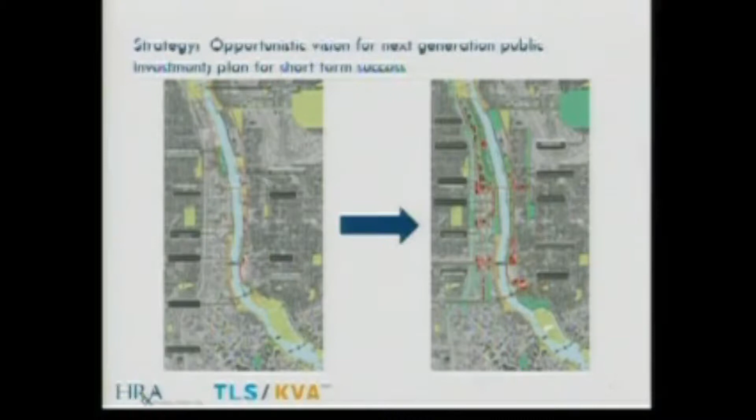In order for that vision to be achieved, we think we need to identify and cost a first phase of work—a phase that is significant enough to indicate that something really special is happening, but small enough to be bite-off-able and achievable in the short term.

We think that first phase of work has to meet four criteria for success. First, it has to establish that the projects advanced in the first phase are successful in bringing the diversity of people who live and work in the city to the river. It can't feel like that first phase is being advanced only for some particular group or groups of people. We have to see all of Minneapolis on the river in the first phase.

By doing so, that first phase has to foster advocacy for completion of the larger vision—advocacy at elite levels and at grassroots levels, a coming together of the community to ensure that the vision gets built out. In doing so, one expects that the first phase should garner media attention, not just local, but national and international media attention, because it is a city branding effort.

Finally, the projects in the first phase have to demonstrate that a variety of public, not-for-profit, and private sector entities can actually get together, negotiate deals, and get projects built, indicating to the citizenry and the business leadership here that this plan can actually come off.

The design team is now going to walk through the components of the plan from a design and vision point of view, and then I'll come back and talk to you about what we think the first phase is likely to cost and where sources of funding can be identified for both its capital and operating components.

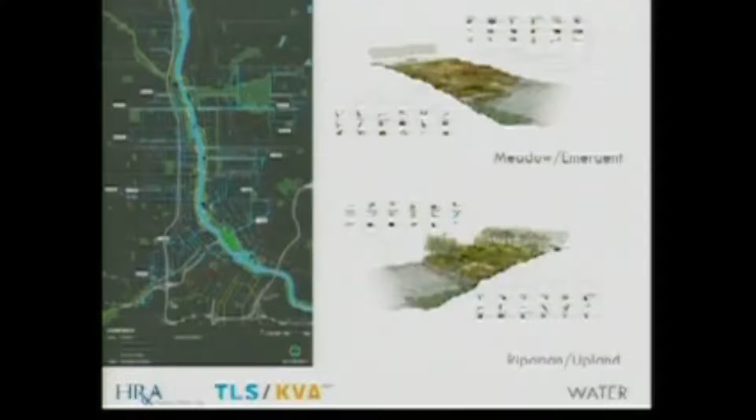Those landscapes are supported by varying levels of soil moisture, and we can go into more detail, but basically the position of landscapes in relation to elevation and water is being used to design the entire system.

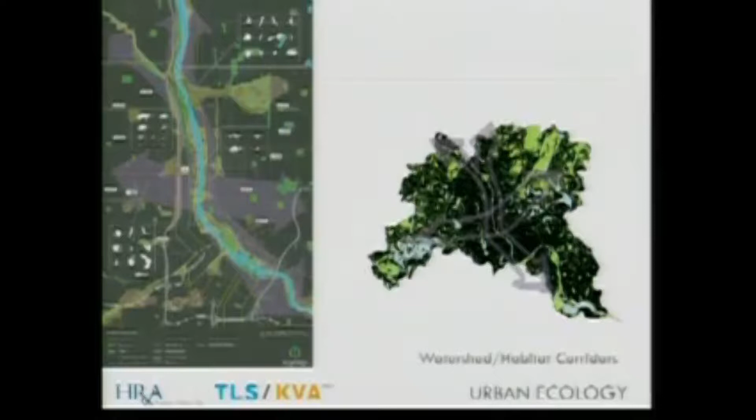And this is the outgrowth of this habitat diversity. We will now have a corridor that works both north-south and east-west to complete the grand rounds, not only for people, but for all species, animals and so forth, to create a new flyway through the entire Mississippi corridor. And Sheila's going to expand on that.

Thank you, Tom. So we propose to make a comprehensive remediation of the city's stormwater system, to clean that water using natural processes, and then to use that water in various different moisture gradients to create habitat to support the carrying capacity of the kind of very important national flyways that you see illustrated in this diagram.

So it's not just about water moving and about birds migrating and animals moving. Of course, it's about people moving. A central concept of RiverFIRST is to bring the citizens of Minneapolis to the river.

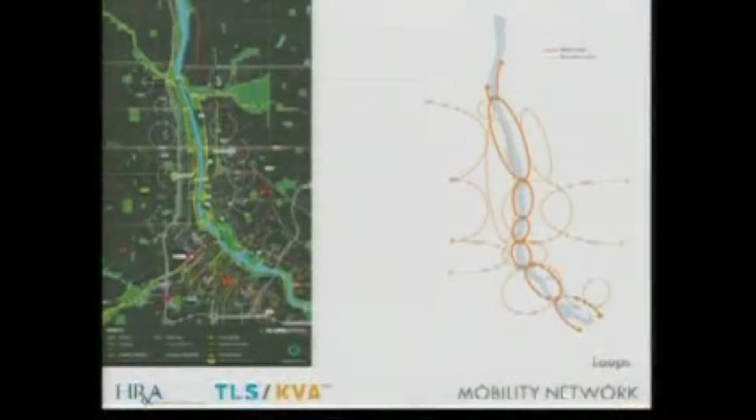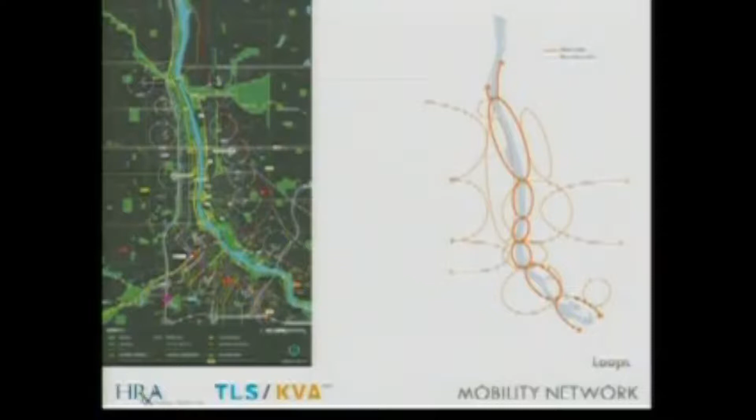There's a comprehensive bicycle path system, and you see there in circles the kind of radius from any point on north and northeast neighborhoods. You could walk to the trails in under 15 minutes, you could bike there in 5 minutes, and you would have a world-class pedestrian and bike transportation system, trail transportation system.

And you're fortunate enough to have a fantastic USGS internet site which provides 90 stream water monitoring stations. This is already in place in the state, just north of Minneapolis. And we propose to take advantage of that resource and pair that with social media to create a communication infrastructure, which would be a cell phone application that we propose be called River Talk.

This would allow the youngest generation, and indeed all citizens of Minneapolis, to get information about the river, to coordinate events on the river, and we think there could be a very significant educational and interpretive public outreach that could be brought into the classrooms.

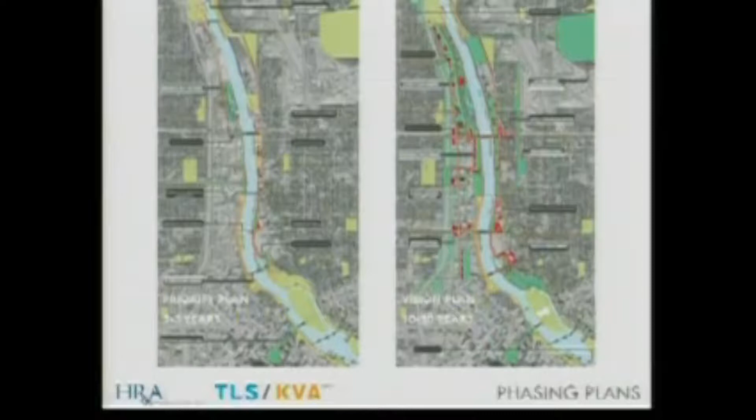This is a lot to talk about in 10 minutes, but we're going to try to move through. Please do interrupt us if you have questions. We'll try to answer them.

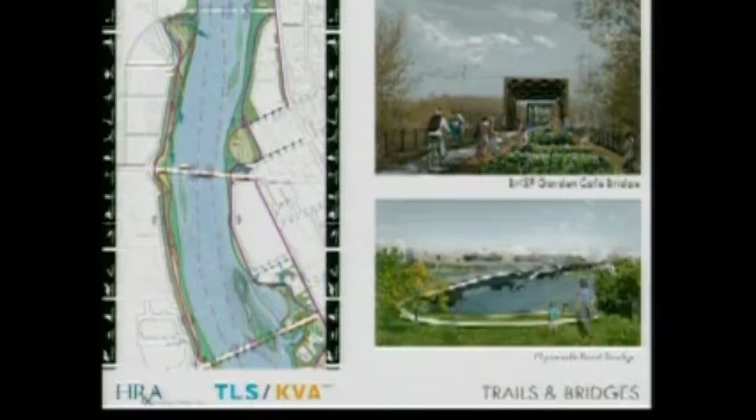This image shows you a view of what the BNSF bridge could look like if that became much more friendly, with that existing bridge reappropriated for bicyclists and also for pedestrians. And then this is the Broadway Bridge, and you can see here the very light, delicate steel pedestrian bridge that we propose that would come across and connect these two sides. I apologize, I misspoke—this is the Plymouth Knot Bridge.

This is up at North, just to show you how these trails would connect with northbound trails up at Camden Bridge. And I'd like to draw your attention to what we're proposing here, a series of floating islands called biohavens. These are materials that are machined and made locally here in Minneapolis. The idea is that there's a matrix of recycled plastic, made out of recycled water bottles, and this is a matrix in which plants can be grown in the water.

And there are some very significant remediation figures of merit associated with each of these islands. These islands have been implemented in Montana by the Army Corps and in other sites. We propose to have them here, and I'll share that each cluster of biohavens—we have 6 in this plan—the root systems of the plants can bioremediate 32 kilograms per day of phosphorus, which is the equivalent of about 1,600 gallons of dishwashing soap, just to put it in everyday terms.

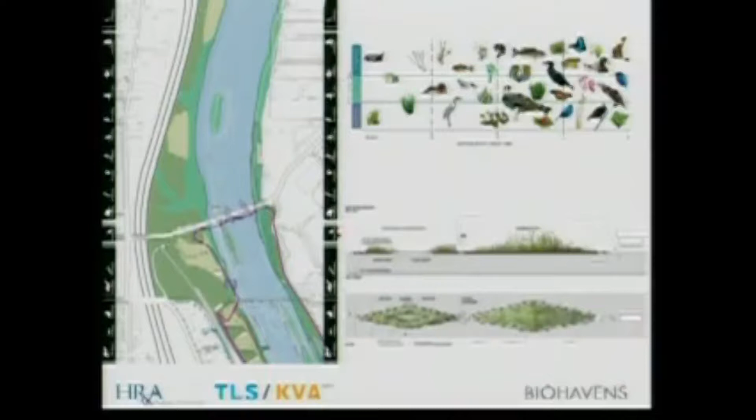They can also remediate about 600 kilograms a day of nitrates, which is particularly important because, as we know, the river is currently impaired for nitrates. This represents more than 225-pound bags of lawn fertilizer. So we feel this would be a way to really clean the water and produce about 5 acres of new habitat that would significantly increase the carrying capacity for migrating birds and also other endangered species.

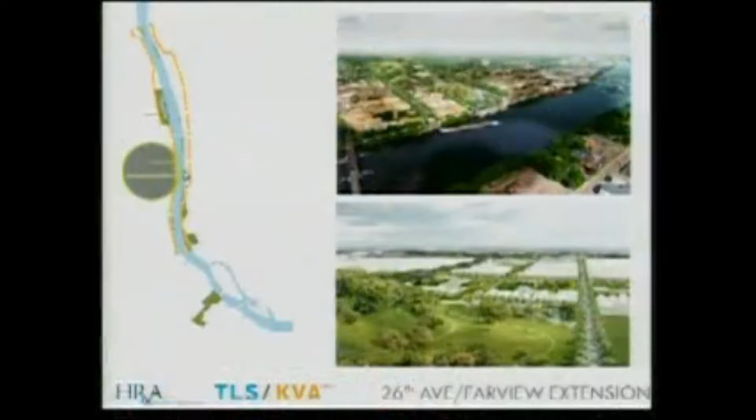I'm going to start talking about the next district. We've talked a little bit about the trails, the knot bridges, and the biohaven islands. Now we're going to talk about the connections to Farview Park. Here in this perspective, you're looking at an aerial view of Farview Park, which is a historical high point. This represents the extension of the 26th Avenue Bikeway, which extends west to Theodore Wirth, with a fishing pier that you see here at this end, and a trail system that moves along, at times rising above existing industrial operations and then landing again. Tom, do you want to continue to talk about this?

Yeah, the fundamental impulse here is to bring the north side down to the river. And if you look at this lower drawing, when we stand up here, we wonder how can we do that? So what we'd like to establish is 26th Street and 28th Street as a major framework for setting up a district which can be implemented over a period of time, infilling with urban agriculture, with ecologically related business, so they can grow with the changing economic situation.

Over the course of the last 4 months, the design team has contacted all the industrial business leadership along this reach of the river and spoken with a number of different CEOs. And here you see a view of this flyway bridge, which at times rises above, allowing the industrial operations—for example, you see here the gantry crane and the equipment of Lafarge—to continue to operate while moving the public safely over these crossings here.

So we think about this as Minneapolis's own High Line, if you will, but this is better than the High Line because it's a spine that really supports conservation, and you have the Mississippi River here.

Scherer Park. What we're fundamentally trying to do is set this up as the urban welcome mat to the entire system of trails, of boating, and of kayaking on the river.

And what we're proposing fundamentally is to recreate Hall's Island, which is a historic feature in the river, pushed out a bit more, and then inviting the river inside to create a more shallow backwater where people can get in and out of boats, where there can be a very large gravel beach and a very large bowl-shaped space, which is created by the embracing arms of Plymouth Avenue Bridge and a new bridge extending over to the island itself. So when you step into this space, you are in an unprecedented scale of this city, of a new beach and a launching point into the river itself.

At this early stage of the proposal, the programming really hasn't even begun, but we'd like to draw your attention, Commissioners, to a theme we heard time and time again in community meetings: people really wish the programming of the new park to be related in some way to the river.

We're proposing a suite of program ideas which have yet to be validated, including a local farmers market, a community arts center, and a kayak or canoe rental. We've spoken with operators interested in bringing this facility to a site like this, to think about how recreation here could be related to the river in terms of both recreation and education about the river.

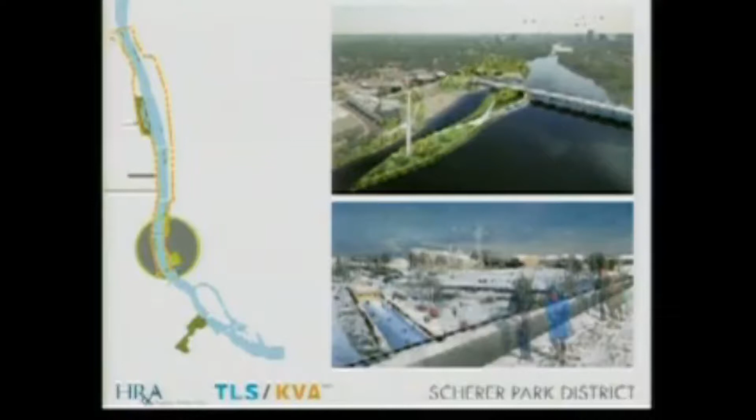This is a view of what that beach might look like with the kind of activity we see happening there. You can see Plymouth Bridge beyond.

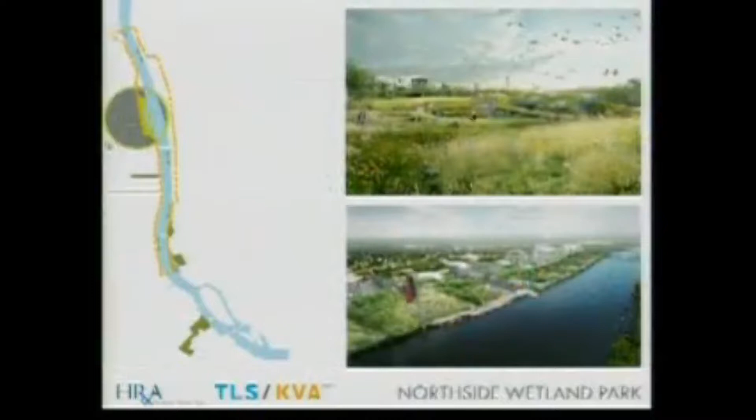Moving then to the north side wetlands here, I'll let Tom talk about this. Well, we think it's time to make a proposal for the port, and so we're here to do it.

Our idea is that you can consolidate the port operations in the northern half of this very long strip along the Mississippi. We believe there's a 20-acre site to the south, which is the most inefficient storage of bulk materials in our view.

That site could be converted to a new wetland park, connected very strongly to the north side by a bridge along 34th Avenue. You see in the upper illustration a view over the entire wetland. The purpose here is a few things at once.

One is to create a massive new collection and remediation system for stormwater from the entire north side, to create a very diversified and ecologically resilient new wetland system together with upland meadows and gathering spaces, and to create a destination for the entire city in terms of ecological diversity.

Now, the area to the north—if you consider the cold storage building one boundary—the question is what happens to the north. There are a lot of scenarios under consideration, and we can't imagine all of them. We've probably taken the most extreme view; the landscape architects can't help it.

What if that whole zone was park? What if you had a park extending from Lowry Bridge all the way to North Mississippi Park? It's a potential. In any case, we have a lot of material coming out of the wetland, and we need to do some land forming to complement that excavation.

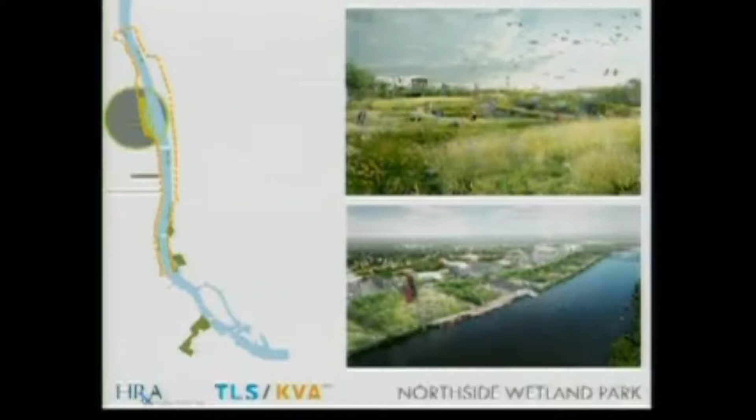The entire architecture of the site is based on the idea of bins, a way of storing dredged material that we'll need to process over time until navigation stops. What you're seeing here is the first evolution of a bin, where a ridge trail can traverse the entire zone along the backbone, along the railroad.

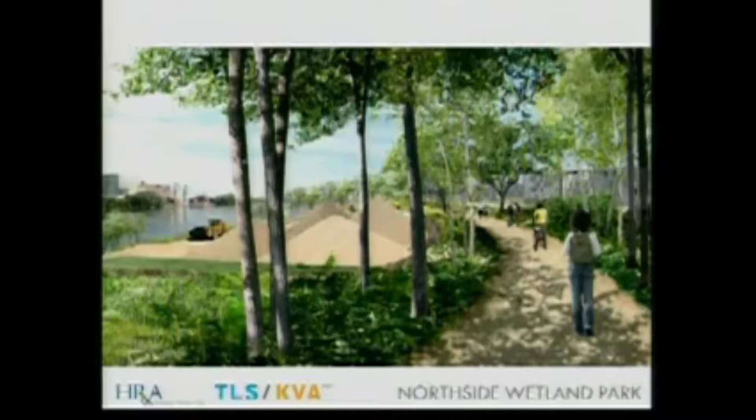Arms extend, and then we use the infield stored dredged material as it's being processed and transported. There's potential for early settler and native agriculture, and the possibility of park rooms that are basically meadows for people to come in and use, backing up their pickup with their cooler and beer for a fantastic barbecue. So what we're proposing is that this park could be built from what's currently thought of as a liability, the dredge spoils removed from the river, and transform that into an asset, growing this park over time in a series of public river rooms with a variety of topographies and programs.

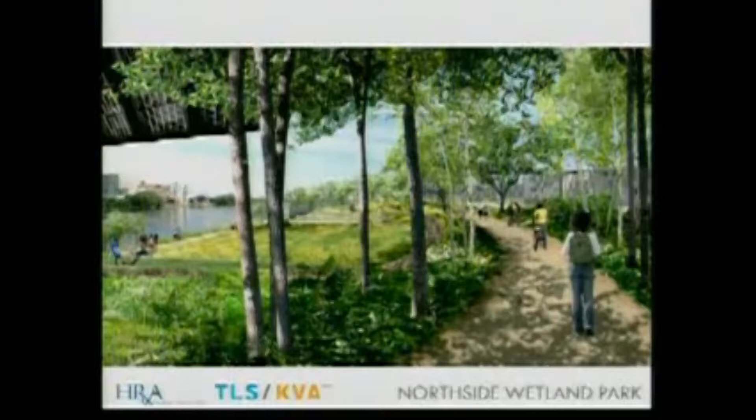And here you are. This is the new form of transportation that you'll all be enjoying soon. This is your experience within the wetland park. It's a new experience, and it's also old.

This is what was here before. This has been restored from its original condition as an oxbow, and also the context that you all know of, power lines, of the industrial heritage. Things have been brought together as a synthesis.

This story is really about what happens in this next century and how we can help create, working very collaboratively with the city, with parks, and with communities, a major cultural shift, a major change in attitude towards the Mississippi River. This is also about how Minneapolis, as a metropolitan city, can find a new way of coexisting with and sustaining a really dynamic living river system.

This is a unique river. We don't need to tell you that. This is about transforming what was a backyard into a front yard, and really creating a set of recreational and educational river resources in a river park system that is commensurate with a national park system.

Last project we want to talk about is Gateway. This is an initiative being led by the Trust for Public Land, and RiverFIRST, the team, is supporting this in terms of its hydrologic connections and its ability to connect people down to the river itself.

What you see in the lower image is the possibility of a major new riparian corridor on either side of Hennepin Avenue, which could frame the entry of people coming across that bridge and entering downtown, grown from the nature of the place, grown from the above-ground hydrology brought up from the river itself, and bringing people down to the river.

Within the park space above, we're recommending an above-ground hydrologic system which could embrace the entire watershed of downtown and clean this water as an amenity, growing the park based on natural principles of forestation and emergent meadows.

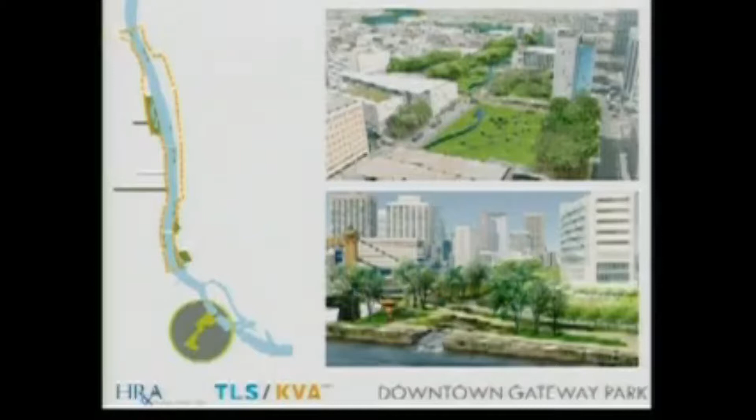Okay, Candace and Danny are now going to present their work on the financial plan for this.

I know the design team would like to spend more time with you talking about the rest of the vision and the other projects imagined for subsequent phases of activity. We've focused tonight on what we think a first phase might be—the collection of projects that we think, by virtue of their ownership and siting, could actually be executed. These parks could get built, and they would succeed in strengthening Minneapolis's brand and bringing everybody who lives and works in the city down to the riverfront.

If the 5 projects that Sheila and Tom began by talking to you about—the riverfront trail system, including the extension of 26th and 28th to the river, the knot bridges, the biohavens, the Scherer Park District, and the Northside Wetland Park—were built as described, we believe the public costs of those capital projects would be something like $145 million, inclusive of a responsible contingency and soft costs.

Now, there are some elements of those projects that are new and more difficult to build. We have less experience with them as a construction industry, and therefore we've shown those numbers with an additional 20% contingency, describing a range of capital costs of between $145 and $175 million, which we think is a reasonable estimate for what these parks are likely to cost if built in the short term.

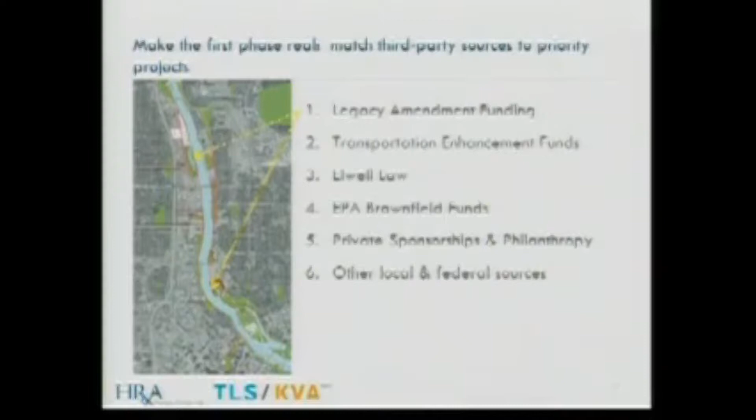It seems to us, on the other hand, that the more significant challenge you're going to have is securing sustainable sources of operating and maintenance funding moving forward. While many cities have found it's possible to raise the capital, they've also found there are challenges to raising operating and maintenance funds, and without securing those funds, your investment is in many ways wasted.

There's a spectrum of sources of operating funding we look to, because it's increasingly clear that the fiscal condition of states and cities across the country is that the general fund, and even special levies like Support the Parks Board, aren't adequate to sustain the kinds of visions of cities like this one.

There's going to be real challenges in finding operating funds for this park. It's not downtown, and therefore won't have the ready access to sources of corporate and personal philanthropy that the Bryant Parks and the post office squares have. It does not traverse neighborhoods that are currently affluent, and this is not a city projected for near-term significant residential or business growth. So finding sources of wealth, expecting to go to the corporate or personal philanthropic community, and being able to locate all the operating funds that are needed is going to be difficult.

Instead, we think it's going to be necessary to, as with the capital, think project by project about where sources of operating funds are likely to be.

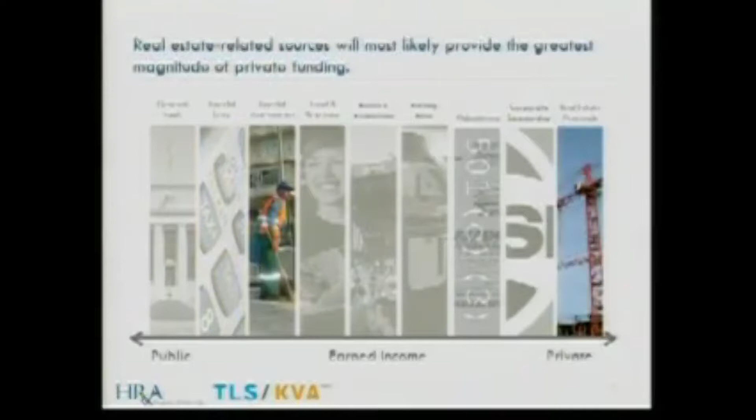Shortly thereafter, though, and in the near-term, planning for the notion that real estate-related sources can be a major source of operating funding also is, we think, worth thinking through very carefully. This, again, has been the experience of most other cities seeking other sources of operating funding.

That real estate, the value that new parks create in terms of additional real estate development and higher value existing real estate development, is something this park ought to capture. It's creating that value; it should be sustained by the increment in value.

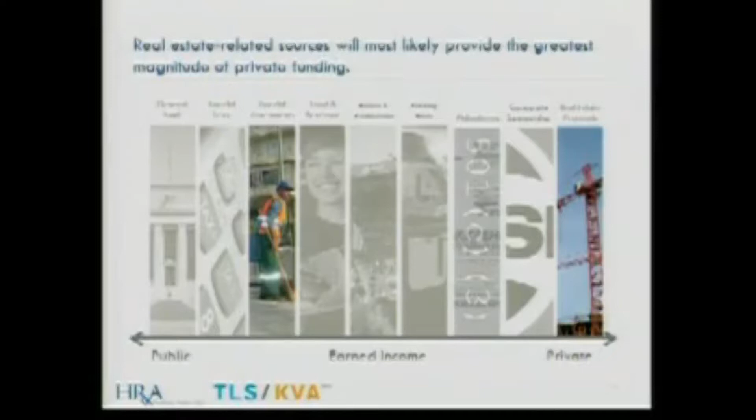And there are really 2 ways of getting at that. You can levy various kinds of special assessments on the increment in value, or you can actually develop your own publicly owned parcels and use the site disposition proceeds to help support the park.

In the short term, and remember this is proposed for phase 1, all the market data we've reviewed suggests there are really 2 kinds of uses that could be appropriate for being developed on public land adjacent to the park, and that pencil from a development point of view: first, low to mid-rise residential, and second, owner-occupied space.

We show you the Coloplast building here, not to suggest that Coloplast is appropriate for the park, but that these are the kinds of entities that don't need to make money on development, that value being on the riverfront, and want to occupy their own buildings to the extent that what they're doing is consistent with the mission of a park, are appropriate and do work as a market proposition.

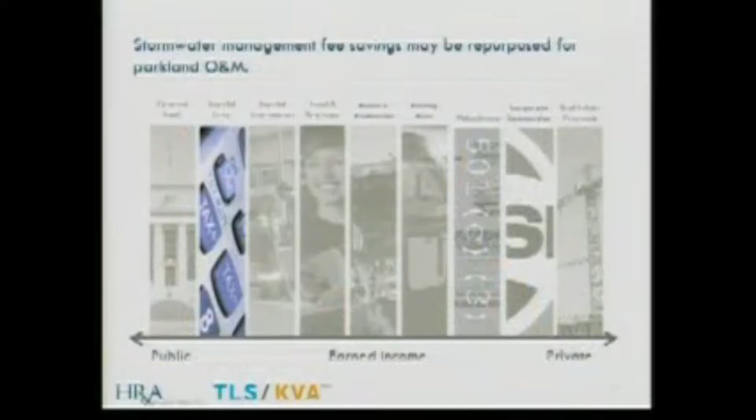What you'd be looking to do is develop public land in a way that creates an operating stream of revenue. Rather than selling it, ground lease it so you're getting rent for the long term and retain the value of the land. Similarly, you can think about special assessment districts or housing improvement areas around the parks where real estate value might be created, and look to that as a source of operating funds. We think real estate is likely the single greatest source of new operating funding, but it's worth looking at other sources too.

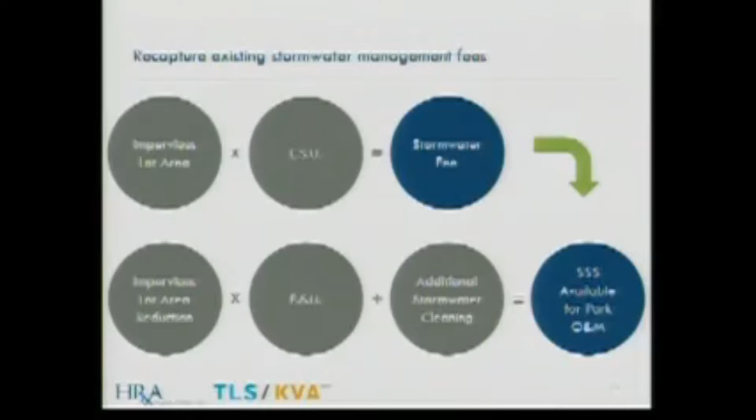This plan creates enormous environmental benefits for the neighborhoods around the river and for the city and region as a whole, and some of those benefits may be able to be monetized. For instance, you currently have a stormwater management fee applied based on how much impervious cover exists on a given site. If some of that cover were removed by how the park is operated, and the water is clean and the site less impervious, you could share in the reduction of stormwater management fees with the owner. The owner benefits by paying less, and the park benefits by gaining a source of funding that otherwise would have gone to stormwater management fees.

Neither of those sources - real estate, plus the existing levy, and the stormwater management fees and other environmental levies - are likely to be sufficient on their own. There will still need to be thinking about how these parks are programmed, whether events, catering, food, promotions, philanthropy, and corporate support can also be leveraged to ensure these new parks are maintained to the standard you will want to see.

Final slide, and then we're very interested in taking your questions. All of that begs the question of who is advancing these projects. It's a vision of sufficient scale and ambition that no single entity can be expected to take on all these projects. It will be a partnership of a variety of public, private, and not-for-profit entities.

We would suggest that in the first phase, to the extent these 5 projects resonate as a first phase, the Parks and Recreation Board should consider taking the lead on the trail system and on the Scherer Park District. The trail system is very much core to your current mission. You've assembled most of the land at the Scherer Park District and are actively engaged in demolition there, and those are two kinds of transactions the Parks and Recreation Board has experience with and could lead, while looking to other entities to advance, lead, and manage the other initiatives we've described.

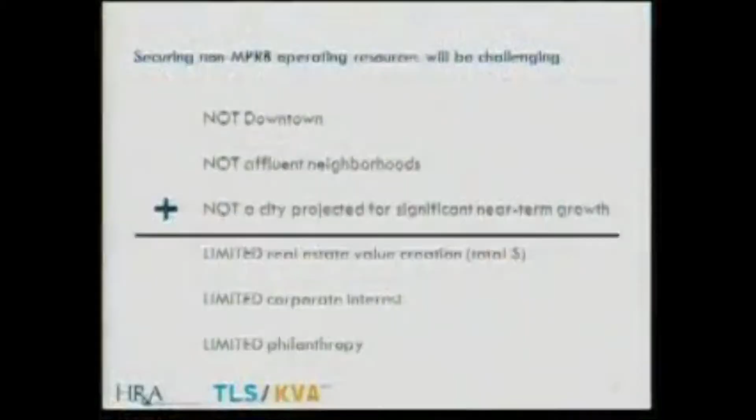Nonetheless, there are some challenges. Yes, of course, as always. And I really want to thank you for the feature crossing between 26th and 28th, and your acknowledgement of the agriculture and urban farming, the urban signature of what's happening over there with community farms and gardens and urban agriculture. When you first showed us this at the Walker, you talked a little bit more about the green corridor and the energy corridor, and it didn't quite come through in this. Is that still going to be there? You did show an energy center somewhere that will provide electricity?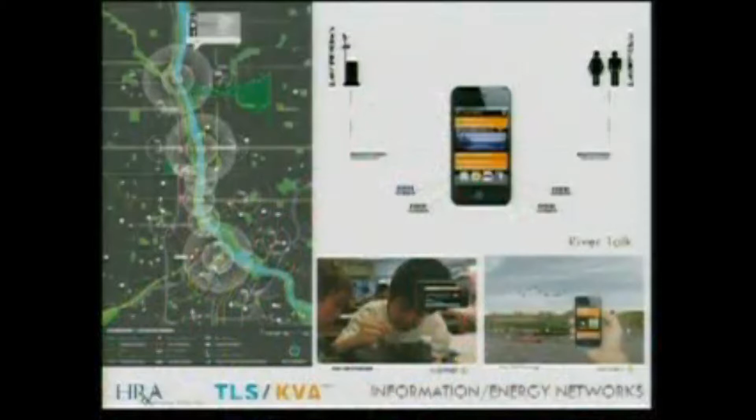Yes, maybe for the amphitheater? That's right, let me allow Candace to find the slide. We still feel very much that the river itself can be a source of energy. We've looked into run-of-river turbines, and the current rate that the water is moving is actually not fast enough to really create a very large amount of electricity.

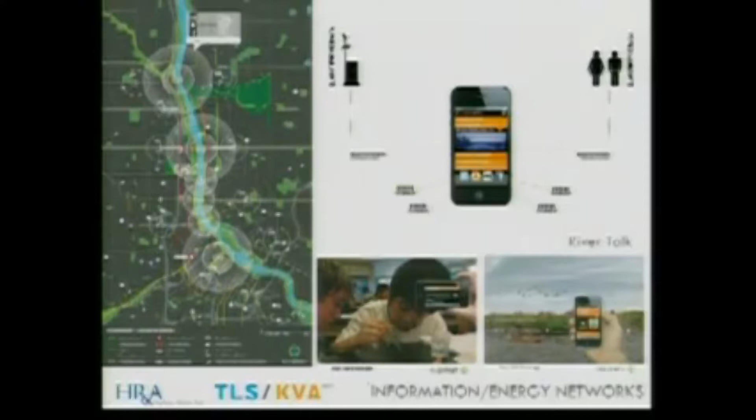So instead, what we're looking at are some solar installations. You may know that Xcel is also considering some solar installations on the northeast. So we think that it would be possible in the area that is currently the port to create a significant new model that would make park operations much more efficient. We think that we can have a much more sustainable park with less money spent on mowing of grass, on operations, and also things like lighting and park standards.

I do believe that this is a realistic ambition if this is the direction that the city and parks want to move forward in. Thank you, it's great, that's what I want. Thank you, Vice President Young.

Commissioner Vreeland: Yes, thank you. I very much appreciate this. Perhaps we should call the Scherer Brothers District the Horace Cleveland District. This really is an incredible homage to the vision that created this park system of protecting our shorelines and protecting natural areas. And this is the area that kind of got missed out.

And also connecting B.F. Nelson, Boom Island, Scherer Brothers is such a large and wonderful piece that allows us to do many different kinds of programming and activities, and really incorporate nature and people activity in ways that could fit together, I think, well. So again, I'd love to hear more about how Boom Island is especially integrated, as well as B.F. Nelson, and I think we have lots of opportunities to do that.